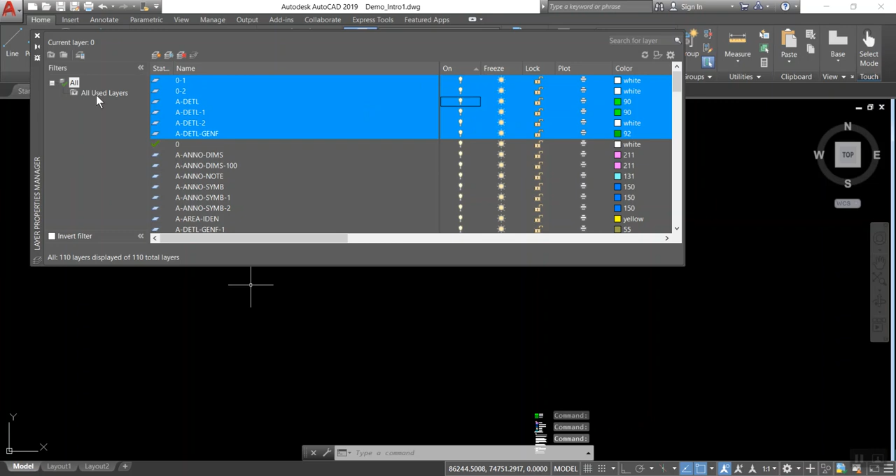First, go into layer properties and click on that, and you can see which layers are hidden. You want to unhide all those layers. By clicking on the heading, you can see which ones are hidden or not. There's a few layers there, so I'll click with my mouse, hold the shift key, and click that layer as well, then click on those lights to turn them all on. Now all my layers are visible.

You'll notice on the bottom of the screen I've got these notes, which aren't really useful for my set out. So I left click with my mouse and click again to select all those notes, and I'll just hit the delete key.

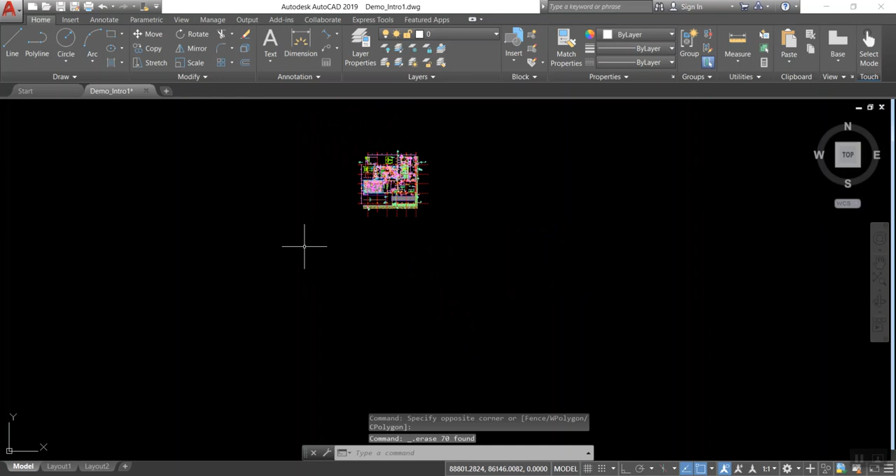Now if I double click on my mouse wheel, the whole image zooms up to the full screen. This is what you want - the image as big as possible so that on the tablet it looks a lot easier.

Now a few things you can do here. I started off by freezing the layers I'm not interested in. In this drawing, I'm only interested in the internal walls because that's what I need to set out. So I'll click on this button - if I hold my mouse there it says freeze the layers of the selected objects. I'll click on that, and now I'll start clicking on objects I don't need, and that makes them disappear.

All these dimensions as well - if I click on them, they disappear because I don't need them when doing my set out. It's a good idea to save as you go along, just so you don't lose any work. So I can keep going and start freezing layers that I don't need.

These things here can go. The names of the rooms, I don't really need them, so they can go as well - again, just save as you go along, and click on the freeze button. These doors as well, don't need them. You can see the drawing is starting to clean up now - it looks a lot easier than before.

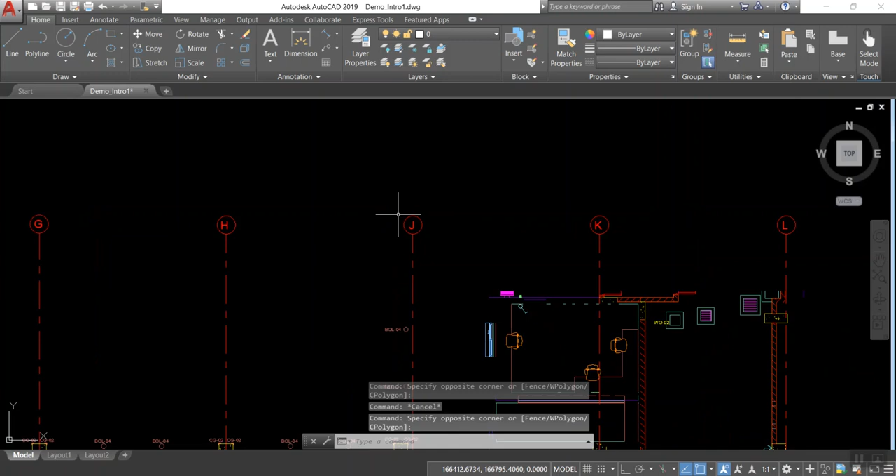Another little tip: if I want to select an object, I left click, move to the right, then click again - whatever's wholly within that container gets selected. So if that whole circle is not in the container, it doesn't get selected. But if I left click and move to my left, as long as my container just touches one of the elements, it'll select everything - that whole element. This can be a great little tip when you're doing your clean out.

Let's have a look at what else we can clean. Doesn't seem too bad - I might want to get rid of some of these doorways, all these doors. This furniture as well, don't really need that in the room. That information there can go, not relevant for wall set out. These little toilet cubicles, again, I don't really need that - I can get rid of that.

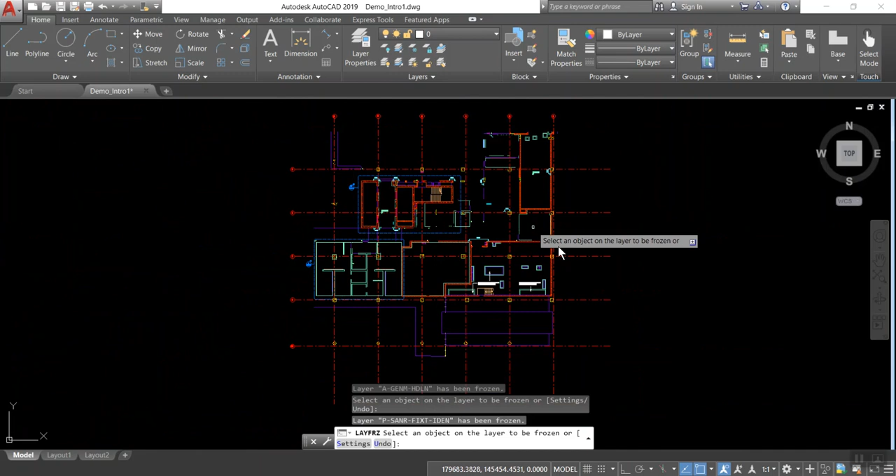So all I'm doing now is just basically freezing the layers. And this now is looking a lot cleaner than it was before.

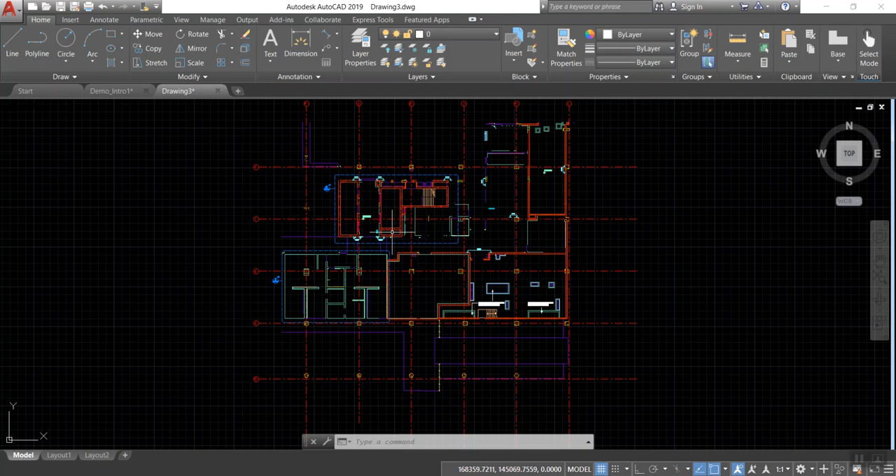Once you've done all that, the last step I do is select the whole drawing, Control C to copy, then open up a new tab. Right click, go to clipboard, and it's very important here that you paste to original coordinates. If I double click on my mouse wheel, you'll see there's now the cleanup drawing with just the internal walls that are relevant for me.

And the last step here is I'll save the drawing as well, and I'm going to call it 'clean' so I know it's the clean version. That's it - hope you found it useful.